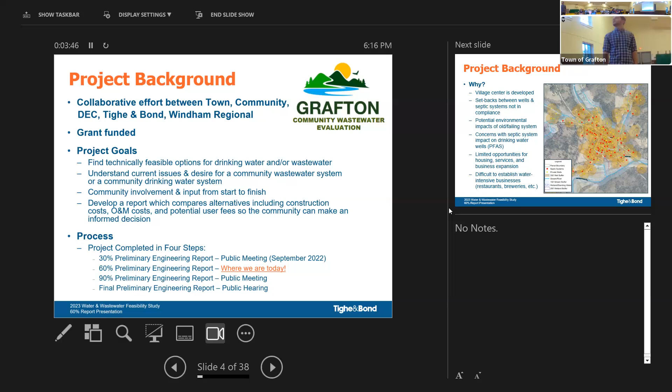So why would Grafton want to go ahead and do one of these feasibility studies and look into potential water or wastewater system? A few reasons. Number one, the village center is developed. We're right here in the village. There's relatively small parcels that are pretty close together. And what happens there is you got drinking water wells relatively close to leach fields. And that can become problematic, especially if they're not maintained or old systems that have failed. And there's also some concerns that Aaron just mentioned with PFAS around the school as well.

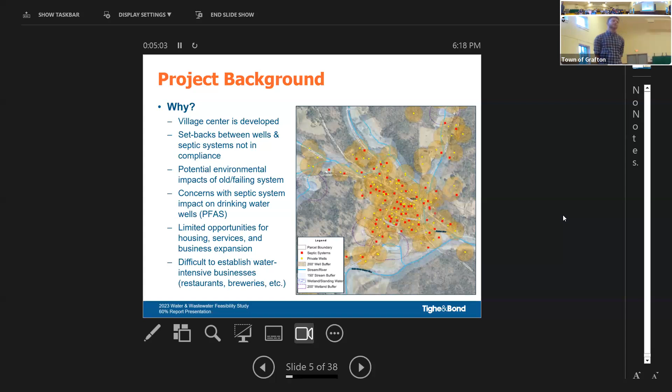We've also seen with other communities that without a public drinking water wastewater system, sometimes that limits opportunities for certain types of housing, businesses expanding. For example, if you want to add a bedroom on top of a storefront, something like that. Sometimes you can be limited by the size of your parcel and septic system. It's also difficult to establish water-intensive businesses like restaurants and breweries. Sometimes that can be limiting. The lack of a public sewer system can be limiting there as well.

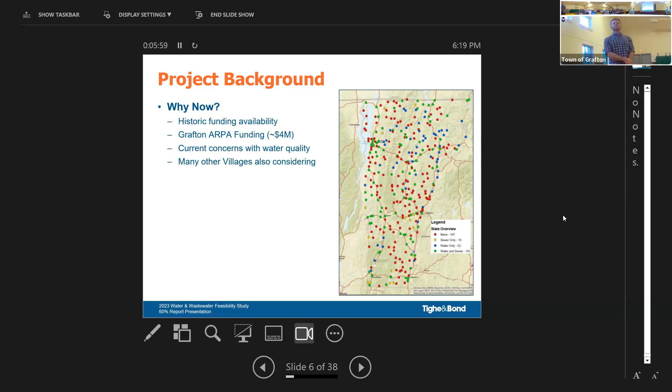So going back about a year, it's like the end of September last year, we had the 30% meeting. During that meeting, we talked about a service area. So service area is which parcels would be included in the system and be served by a public system. We came up with a flow estimate for that service area. And then we spent a lot of time talking about two sites mostly for a wastewater system. If you recall, for those of you who were there, one was the Village Park site, and the other was the Alpine Field site, which is the field back behind the cheese factory up on the hill.

We got a lot of good feedback from that 30% meeting, and kind of the general takeaway there was that Alpine Field was generally preferred due to its size and kind of isolation from the village. So it looked pretty promising on paper. I'll talk about some site tests we did there in a minute. And then kind of that last part we talked about during the 30% meeting a year ago was considering a drinking water system.

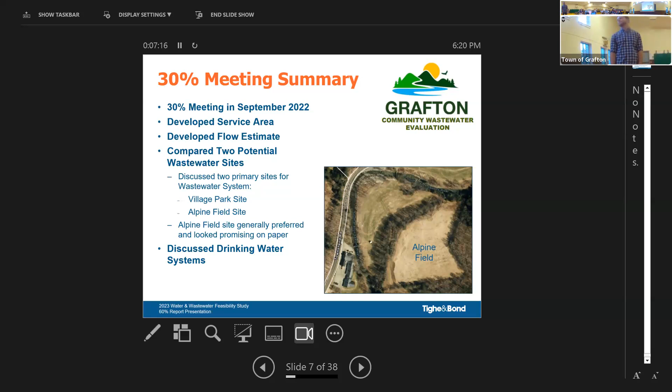So speaking of drinking water systems, as Aaron said, we've been working closely with the DEC over essentially the last year. And the drinking water system is a little bit of a complicated situation. So in our original scope, we had to investigate a community drinking water system. That was in our scope because it was kind of a hot topic in the town at that time and a concern because of the PFAS.

So Aaron touched on this a little bit, but just for those of you who don't know, PFAS is essentially a man-made chemical that has been used in all sorts of consumer products for many, many years, I think back to the 40s. And it's been found in a few wells around the school. And one thing to note is that PFAS persists in the environment for a long time. It's important to remember here in a second when I talk about how it relates to a wastewater system.

So some specific considerations for Grafton related to a drinking water system. We could consider just a standalone public drinking water supply system and no wastewater system. So that's an option that we wanted to look into. And then we started looking into the Village Park site and what it would take if it was feasible to use that site for a wastewater system.

And there's what's called a 2-year time of travel requirement, which just means you want your wastewater system to have no wells downstream within a 2-year time of travel. So that wastewater that goes back into the soil needs to take about 2 years before it gets to a well.

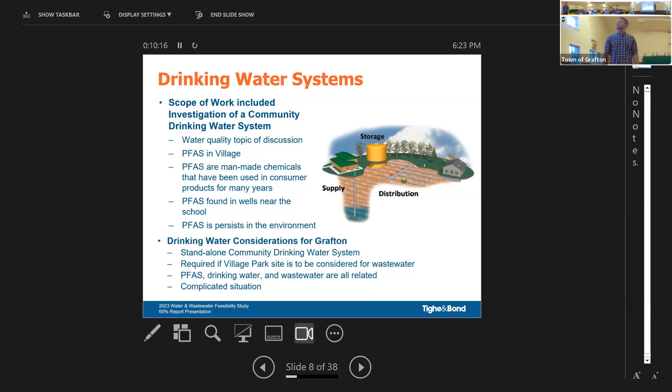So one of the things that became clear in discussions with the DEC when talking about a drinking water supply system is that the town, in order to permit a new community drinking water system, would need to demonstrate what's called technical, managerial, and financial capacity. We use TMF for short. Essentially what that means is that the town needs to have enough personnel and proper finance to successfully operate and maintain a drinking water system.

So that would be a challenge for Grafton, and Grafton's not alone in that. Any small village or community struggles with that as compared to a city, for example, where they've got a lot more resources. So that's one major challenge that we've run into here with the drinking water system.

So path forward. The DEC has determined that a separate drinking water system preliminary engineering report would be the right next step to consider a public drinking water system, which would also need to be considered if we wanted to consider the Village Park site. And that drinking water PER would be fundable through a grant through ARPA. It's essentially the PER we're doing now, but the one we're doing now has been a little bit more specific to wastewater. So we'd essentially redo this project with a specific look at multiple options for drinking water.

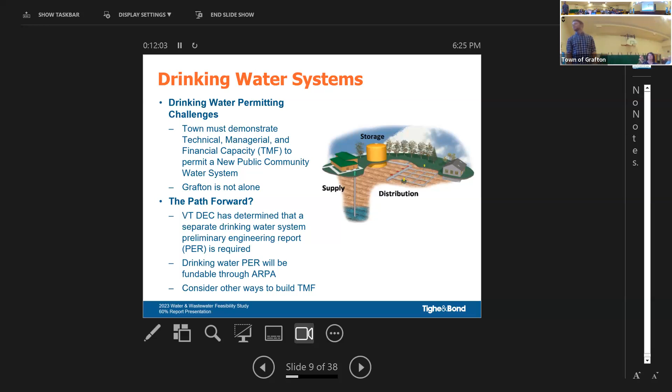So I know it's a little hard to follow. It's a little bit confusing. This is just a very simple process flow diagram of how we would move forward to consider a drinking water system and even a wastewater system, truthfully, because, like I said, there would need to be some sort of drinking water system to address PFAS before we could send it to a wastewater system.

So right now, we're in the wastewater feasibility in the orange, 60% report. Moving forward, what we would do is take a little pause on the wastewater and then pick up the drinking water and get that to a 60% level, and then bring it all together and move both wastewater and drinking water forward in a collaborative effort.

So, that's a lot. There's probably a lot of questions on that. I think what we'll do now is I just want to focus on the wastewater system for the rest of the report, the feasible alternative that we have in there right now, specific to wastewater, and then we can get back to some questions on the drinking water.

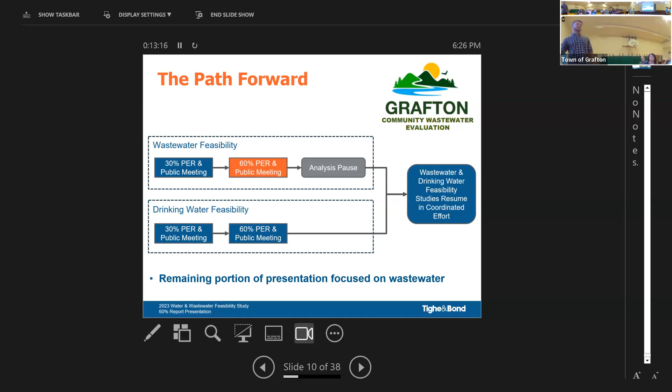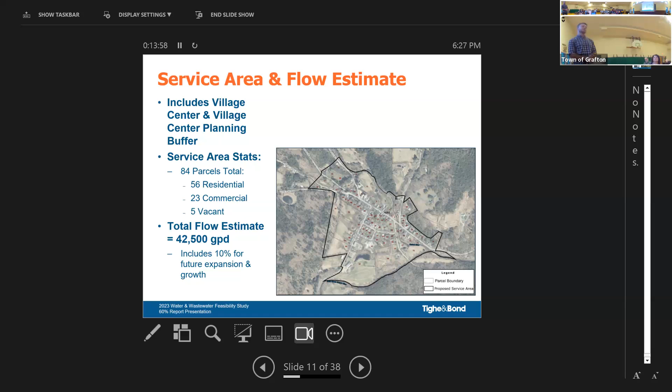So back to Alpine Fields. After we had that meeting back in September of last year, the town and ourselves went out to Alpine Field and did some test pits in November. Unfortunately, we didn't find exactly what we were looking for. We ended up finding signs of high seasonal groundwater, which becomes a challenge with installing a septic system there.

Not that it couldn't be done, but what you'd have to do is essentially create a large mound system where you bring in some fill, which gets pretty expensive. But even more importantly, in this case, it would also limit Windham Foundation's use of that site, because they currently use that for spreading the whey from the cheese factory. So we had to go back to the drawing board a bit here for finding another site.

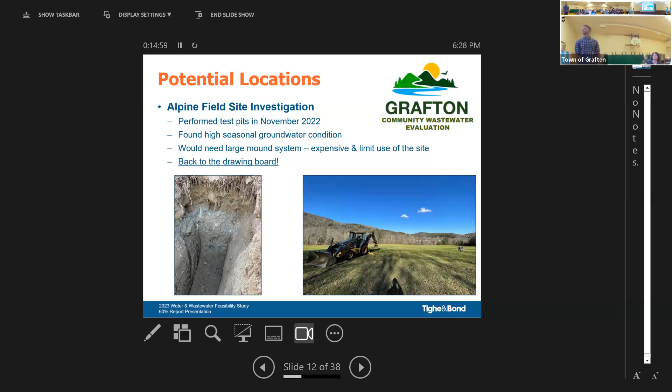So what have we done since those test pits back in November? To be honest, it's been quite a challenge to find a good site here within a reasonable distance of the village. But we've been working with the town to really try to take a thorough pass of all areas that could be considered. One of the first things we did, it's called a cluster analysis. Essentially, instead of trying to find one large site that would work for the whole village, we try to see if there's maybe 3 or 4 smaller areas that we could use. Unfortunately, that really didn't turn out too many good locations because of all the setback requirements from wells and the flood zone and things like that.

We also considered forested sites for what's called a spray field system. What we ran into there was that there's a lot of recreation in some of the forested areas around the village, so we didn't really find a great forested site. So then we said, okay, we really got to increase our radius that we're looking outside of the town. And so we worked with the town, ended up identifying 14 sites, reached out to property owners. We talked to people familiar with those properties and kind of narrowed those 14 down to 2.

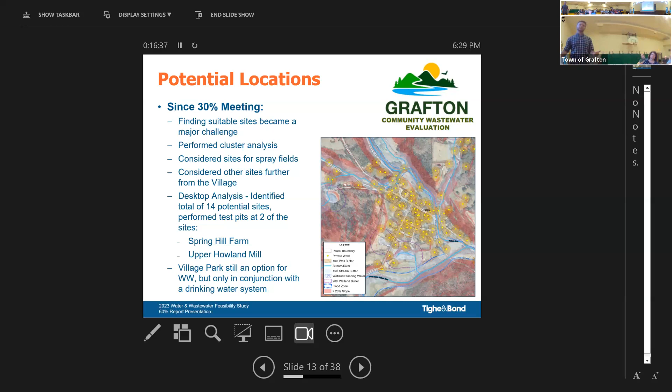One being the Spring Hill Farm site up on Houghtonville Road. The Upper Howland Mill site, Windham Foundation property, to the east of the village on 121. And again, the Village Park, we're still thinking about the Village Park. However, we can't use that site unless we have a drinking water system. So this is just a map showing some of the areas that we considered. Ultimately narrowed those down to those 3 shown in red.

So just kind of a summary of what we found at each of those sites. Village Park site, decent soils below what we call a confining layer. However, like I said, there's a lot of challenges with that site. The Upper Howland Mill site ran into high groundwater again, this time only 12 to 14 inches below grade, so not ideal. And based on those soils, again, it had to be a really large mound system, and ultimately there's just not enough area with acceptable slopes on that site, so that ended up being too small.

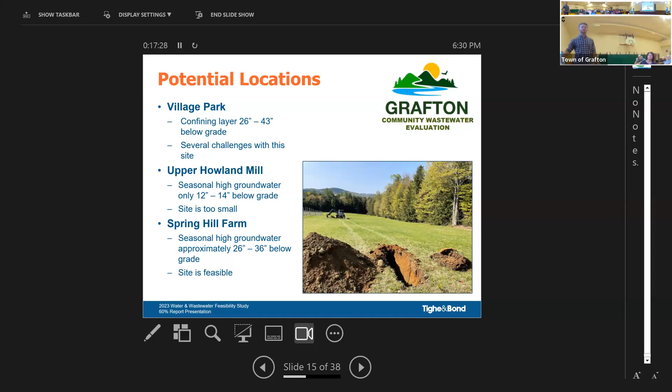The Spring Hill Farm site, however, we did run into some signs of seasonal high groundwater, but much better, a little deeper, which is a good thing. And that site's pretty large and would be feasible. So now we have a feasible site. We started looking at what type of wastewater systems could we go for. We focused here on decentralized soil-based systems, so we're not talking about a conventional wastewater treatment plant with open tanks that are kind of notorious for being odorous. We're talking about a subsurface system that's mostly below grade.

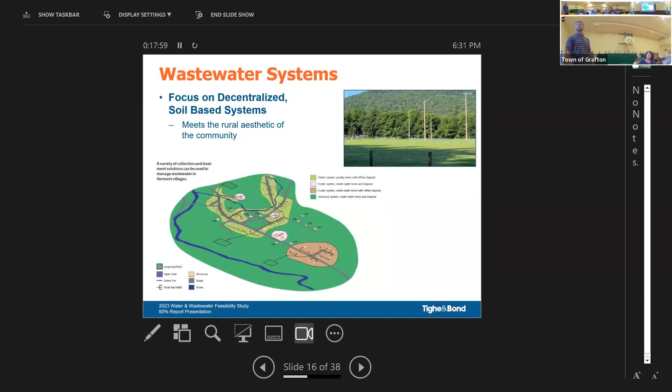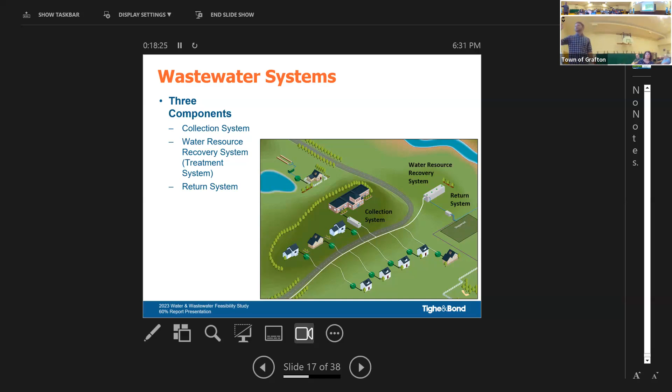So 3 components of a wastewater system: collection system, getting all the wastewater from the houses to a treatment system. And there's the treatment system. You also see us refer to it as a water resource recovery system. And then there's the return system, so after it's treated, back into the ground. So I'm just going to briefly talk about all the different technologies we looked at for each of those 3 components. So starting with the collection system, there's generally 2 types: conventional and septic tank effluent.

Conventionals, a lot of times used for some of those larger communities. Think about sewer system and manholes in a city, where the solids and the wastewater is transported right from the house, right out of pipe, and right into the collection system, which is a pretty big diameter piping. And then there's septic tank effluent collection systems, a little different. This is a lot of times used for smaller communities like Grafton, and the concept here is you still would have a septic tank at each house, and there'd be what's called an effluent filter on that septic tank. So the solids all stay in the septic tank, and then just the liquid wastewater goes out to the treatment system.

There's a couple benefits there. Number one, because you're not transferring solids, you could use smaller diameter piping, and then you can install that piping with what's called horizontal directional drilling. So you don't have to do as much open excavation to install it.

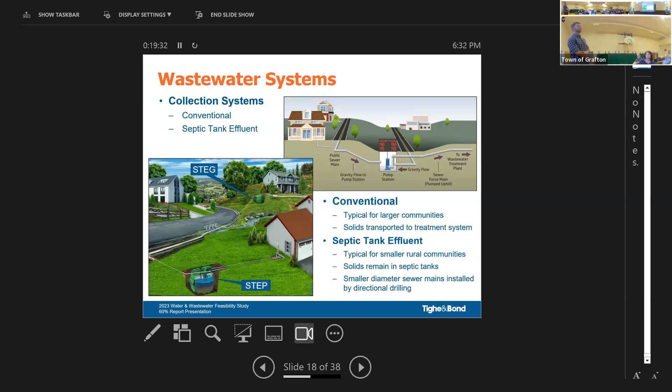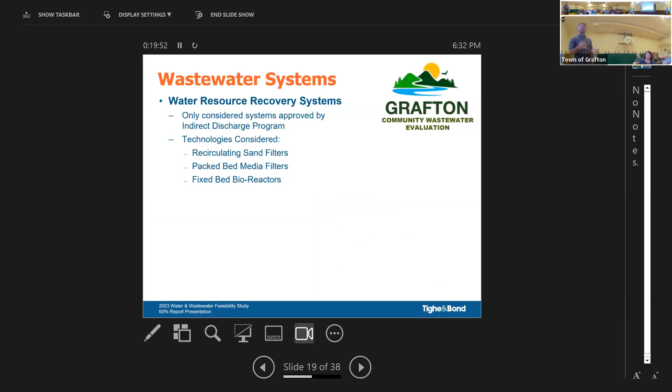Then we looked at 3 treatment systems. We were only considering technologies that are approved in the indirect discharge program. So the ones we looked at are recirculating sand filters, a media filter, and then a fixed bed bioreactor.

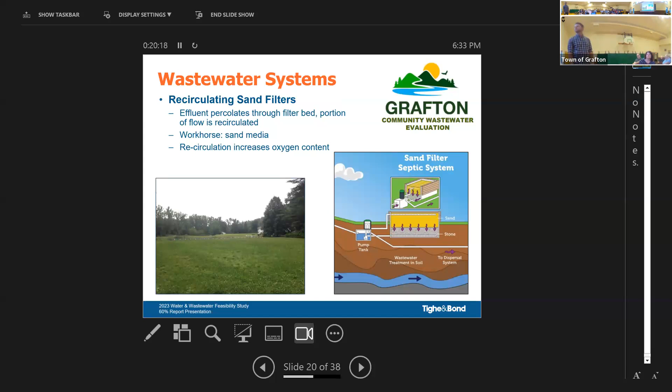So the first one, sand filter, really simple. The wastewater is distributed over a bed of sand, percolates through. That sand essentially treats the wastewater, comes out cleaner. A portion of that is recirculated, and then it goes to the return system. And I'll just mention too, those would be completely buried under a field.

The next one we looked at is a media filter. These are a little different, but very similar. They're all very similar treatment concepts. These, however, come in kind of prefabricated fiberglass tanks. Essentially, inside those tanks is a whole bunch of textile media. So the wastewater gets sprayed over the media, percolates through. There's some microorganisms on that media, which treats the wastewater.

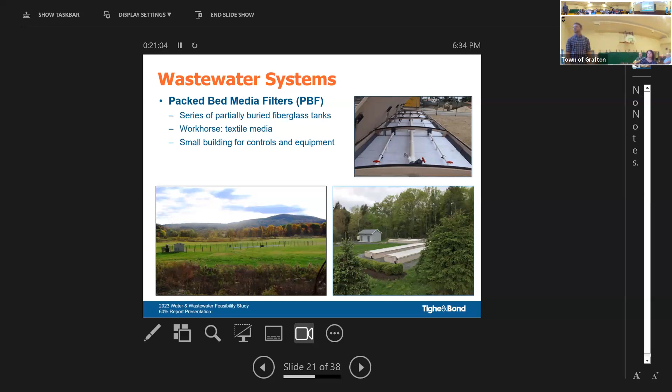Usually these, this picture down on the right is of a completed system. A lot of times those are installed a couple feet out of the ground just to provide access when there's snow. And then the final one, again, very similar, a little bit different style media. These ones are installed in a precast concrete tank. Some air is flowing.

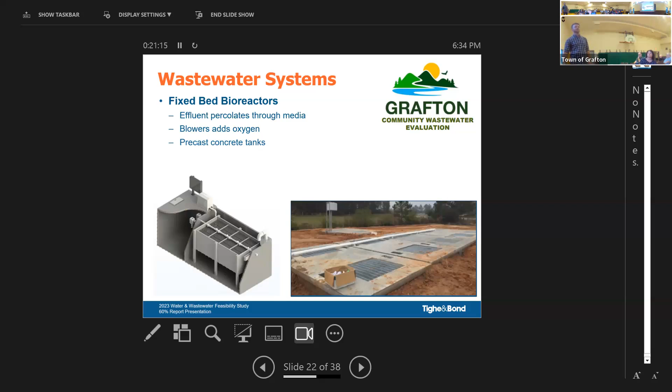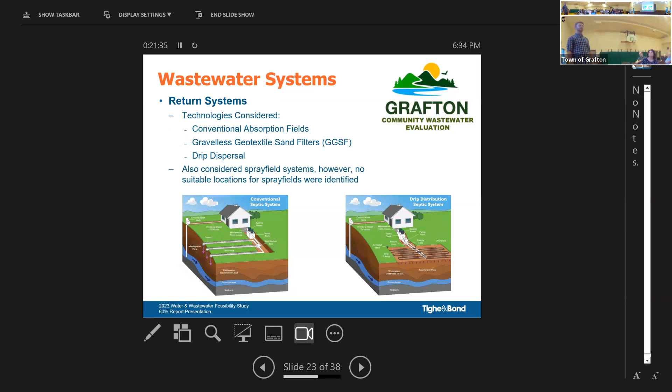And then finally, last component here, the return systems. We looked at 3 types: a conventional absorption field, gravelless geotextile sand filter, and drip dispersal systems. Like I mentioned, we also looked at spray fields, but we couldn't find a good site for those, so I'm not going to talk about it here. So, conventional absorption field, that's what probably most of you have in your backyard. Essentially, a perforated pipe and a gravel trench, except this would be much larger for the whole.

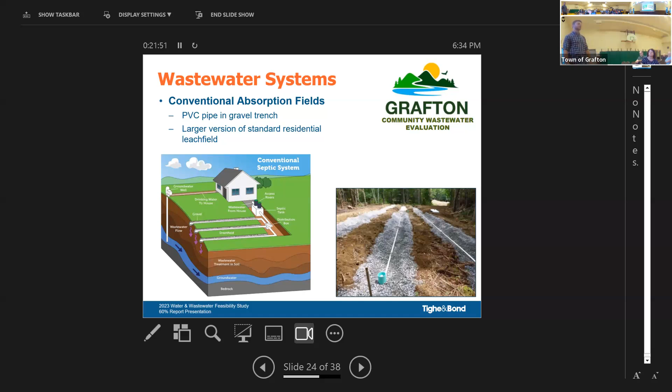Gravelless geotextile sand filters. These are considered an innovative and alternative wastewater technology in Vermont. These systems have a lot of unique advantages for specific sites. Essentially what it is, a little bit more complicated. It's another bigger diameter perforated pipe wrapped in some sort of aggregate, wrapped in a geotextile media, and then put in a bed of sand. It does have some advantages at certain sites because you can essentially have less trench length.

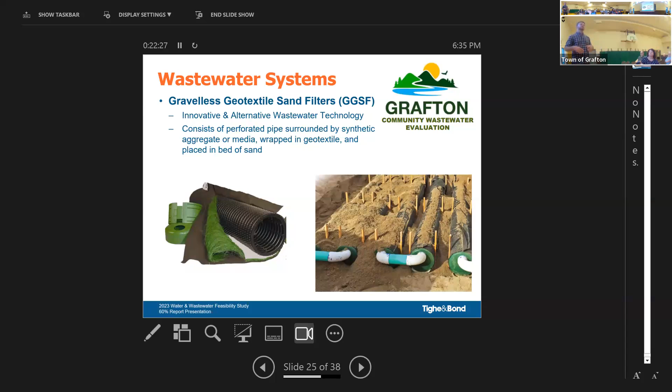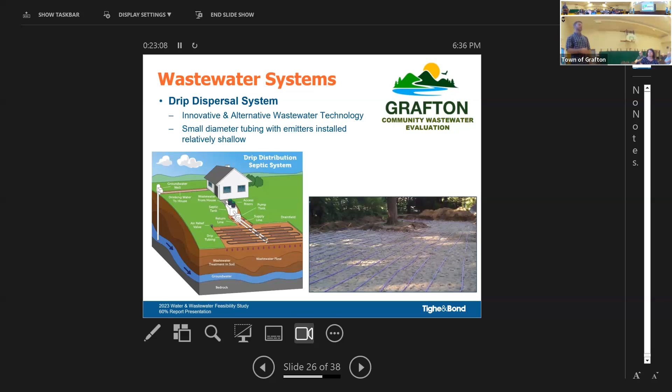And then the final one, drip dispersal system, also an innovative and alternative wastewater technology. These are getting more popular. It's pretty simple. There's a pump tank, pumps the liquid wastewater out into multiple fields of really small diameter piping, and those pipes have little holes, little emitters in it that just send a small amount of wastewater into the ground. These ones have a lot of advantages, pretty inexpensive to install, and you can also install them pretty shallow. So it's really beneficial for sites like some of these sites here where there's high groundwater.

So we took all those different components of the wastewater system, tried to come up with a few alternatives to dive into in more detail and compare the costs. So the first one is a wastewater system at the Spring Hill farm site. The second one would be a wastewater system at the Village Park site. But like I said, that would require a drinking water system, so we're not going to talk about that one tonight. Number 3, just a drinking water system. But again, those require that drinking water PER. And then the fourth one, always an option, is do nothing, which is pretty self-explanatory.

So just to provide a little bit more detail on alternative number 1, the wastewater system at the Spring Hill farm site, try to give you guys a little bit of sense of what that would look like. So what we propose for this alternative is called a septic tank effluent pump system. So there'd be septic tanks at each parcel still with a pump in it and a filter that would send the wastewater up to the Spring Hill farm site. Couldn't do gravity for that location because the Spring Hill farm site is uphill compared to the village. And then at that site would be the treatment system, in this case, a recirculating sand filter, and then a drip dispersal system underneath the field.

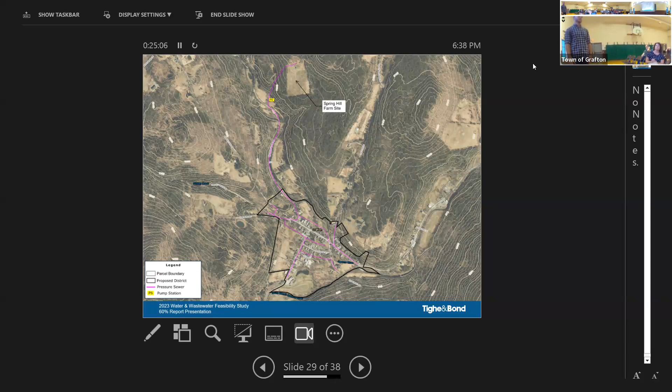So the question that everybody usually likes to know is what's the cost for the system? So looking at the capital cost, we do what's called a class 4 cost estimate. So we came up with a cost estimate for the collection system, the treatment system, the dispersal system, and all of that together for this alternative at the Spring Hill farm site. In today's dollars, around $8 million.

And we also come up with an estimate for the annual operation and maintenance costs. So that number would include part-time labor to maintain and operate the system. It would include pumping out all the septic tanks in the collection system at each parcel. So that would happen on a reoccurring schedule. And then things like equipment replacements, electrical, contingency, administrative costs, all that's wrapped into that approximately $116,000 a year.

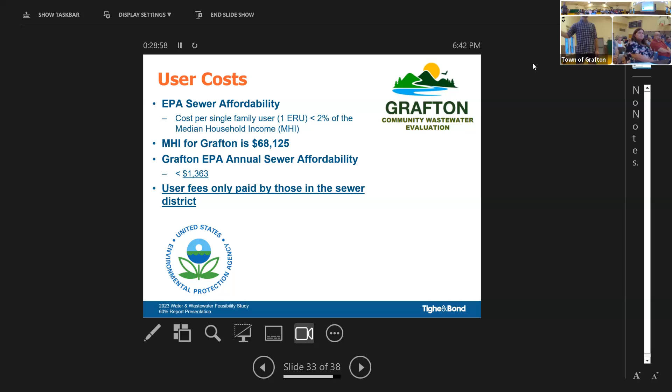Just want to point out too, there's a couple ways that you can go about billing this, but we're assuming that only those parcels and property owners included in the sewer district would be responsible for repayment of that. So only the users would be paying that fee, not other folks in the town of Grafton.

So the question becomes, how do we get to an affordable user fee? And cutting to the chase, essentially the entire project cost would need to be covered under a grant instead of a loan that would have to be repaid at an interest rate. So if, for example, we got grant funding for 100% of those project costs, in that case, the users would only be responsible for repaying the annual O&M costs, essentially. So that spread across the total number of ERUs in the proposed district is about $1,200 a year per ERU. So about $100 a month.